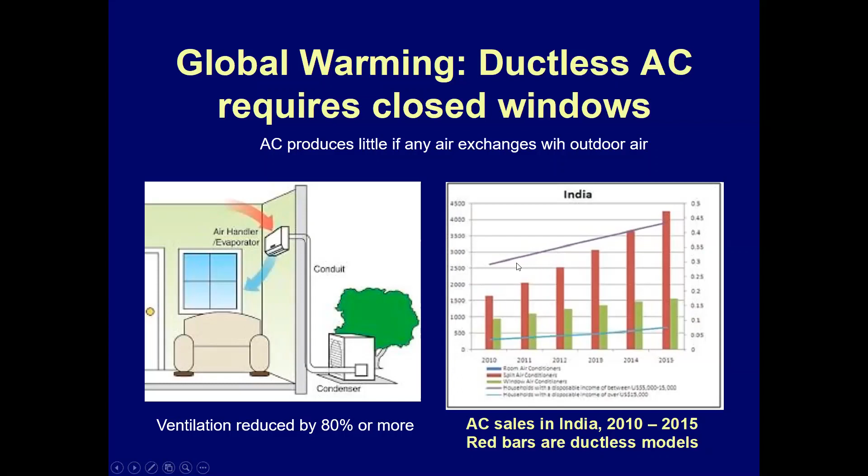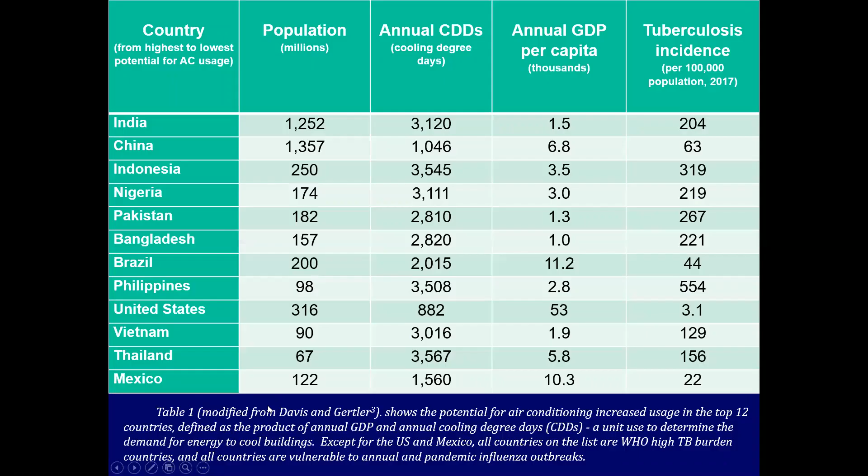And there were 5 people in the room. The window was open. Then we closed the window and allowed CO2 to equilibrate, and then closed the window and turned the air conditioning on.

What does that mean? It means when the CO2 level doubles and the ventilation level is halved, the risk of airborne infection is 2 times higher. Double it again, it goes up another 2 times. So basically we're rebreathing the same air, and the risk, if there's a person with tuberculosis in the room, is quite high as you close the windows.

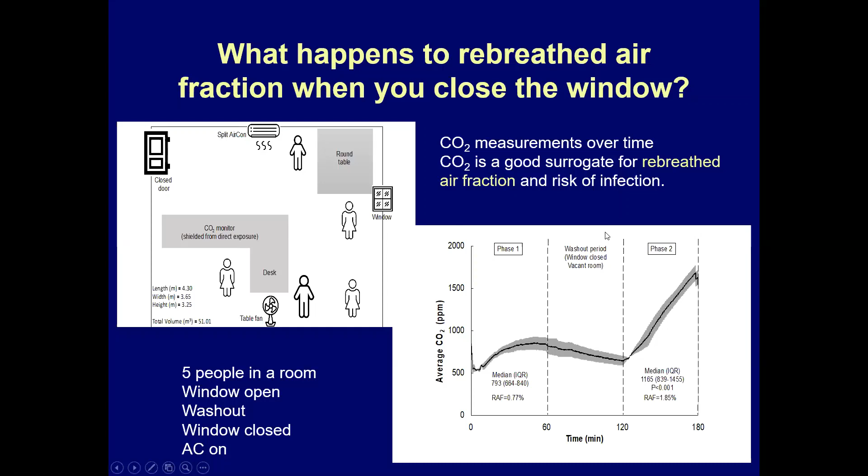You may know that the highest rates of multi-drug resistant tuberculosis in the world are in Russia and former Soviet Union countries. There are many reasons for that, but among them are the ease of transmission in indoor congregate settings, and perhaps also in homes where windows are closed tight because of the cold. Now in warm places the same thing is happening.

I've written this up, that little demonstration, into an article called 'Cool But Dangerous: How Climate Change is Increasing the Risk of Airborne Infections,' and this will be published in the journal Indoor Air in March, and you'll see this in print.

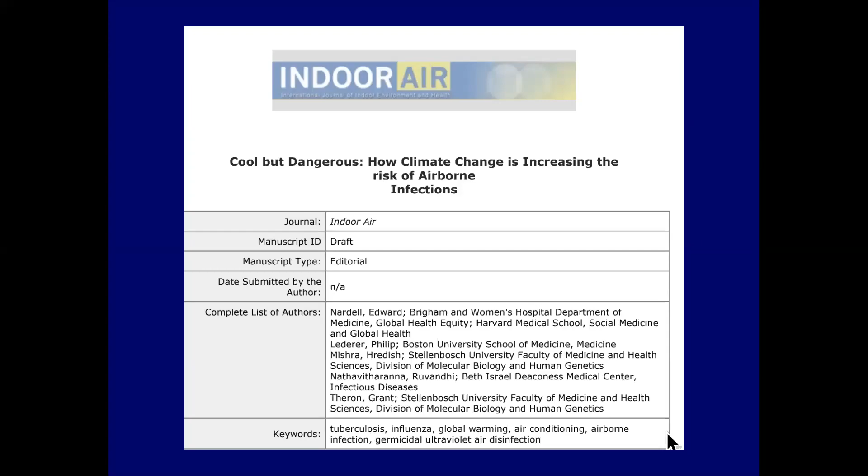Again, the journal is Indoor Air, and it's a commentary with that experiment I just showed you. We didn't need to do that experiment—any engineer could tell you that as you reduce the ventilation by half, the risk will go up by twice. If you reduce the ventilation by half again, which is at least what happens when you close the windows, you increase the risk again by 2 times. So you can go to 4 or 5 times the risk without any difficulty.

What happens when you can't air condition, when you can't open the windows? You need to disinfect that air some other way. That's where there's increasing urgency to implement germicidal UV in places where natural ventilation cannot be used.

That may be in Eastern Europe because of the cold outside, and it may be increasingly in warm climates because of the use of ductless or even ducted air conditioning. So natural ventilation is essential, but it has its limits. It's perfect for outdoor waiting areas where that's possible, but in cold climates and very hot climates, in air-conditioned environments or rooms heated by air conditioning, you really need an alternative method.

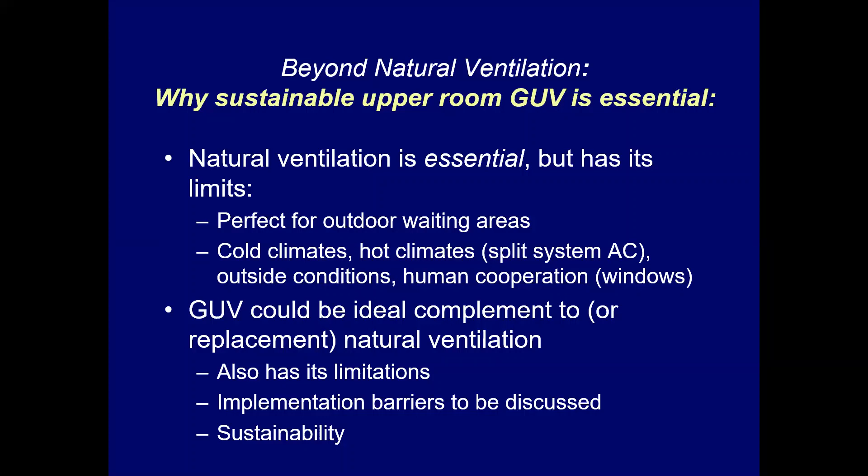There are really only two alternatives to natural ventilation: one is germicidal ultraviolet, which I'll talk about in detail, and the other is room air cleaners. I think germicidal ultraviolet could be the ideal complement to natural ventilation, or replacement when we can't have it. But it has its limitations, and there have been barriers to its implementation, and issues around sustainability, which we'll discuss. Here are the alternatives.

A lot of manufacturers will tell you that these machines work, and they do, to the extent that if you put contaminated air in, what comes out is germ-free. What they don't tell you is how much air goes through this device and what that means in terms of room air changes. Very often these devices are limited by flow, so the number of air changes they can produce is rather limited. I'll go into this in more detail in a moment.

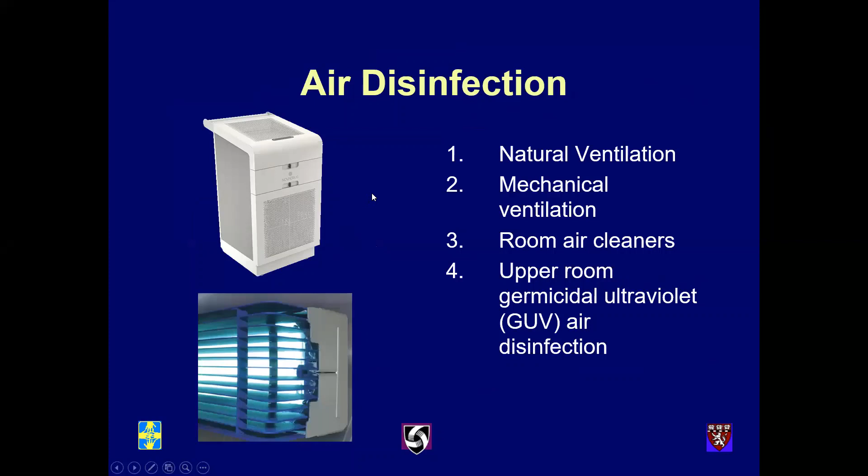And that assumes there's no short circuiting, because one problem with these devices is that some of the air that's just been filtered ends up coming back into the device again and gets refiltered, not adding to the cleaning of the air, but reducing the overall efficiency. So at best, this is producing 2 air changes.

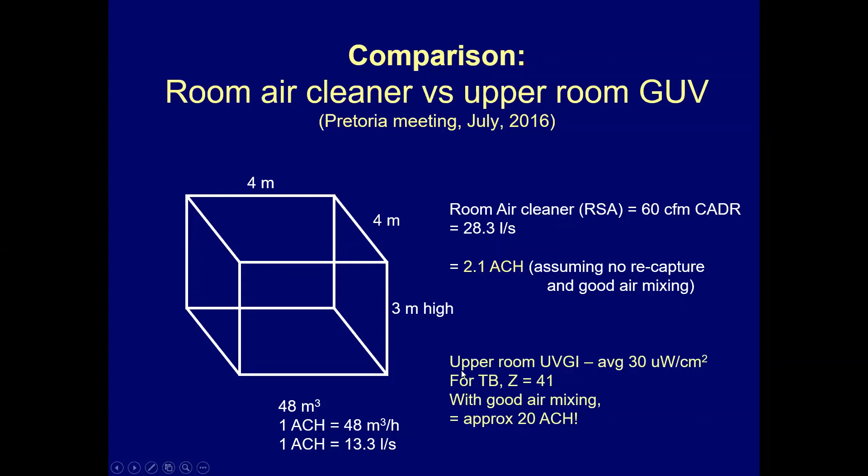I'll show you that in a similar room with 1 UV fixture and a paddle fan, we can produce the equivalent of 20 air changes per hour—about 10 times that—and we have done experiments to prove it. So the idea with upper room germicidal UV is to irradiate the entire upper room, a rather large area and volume.

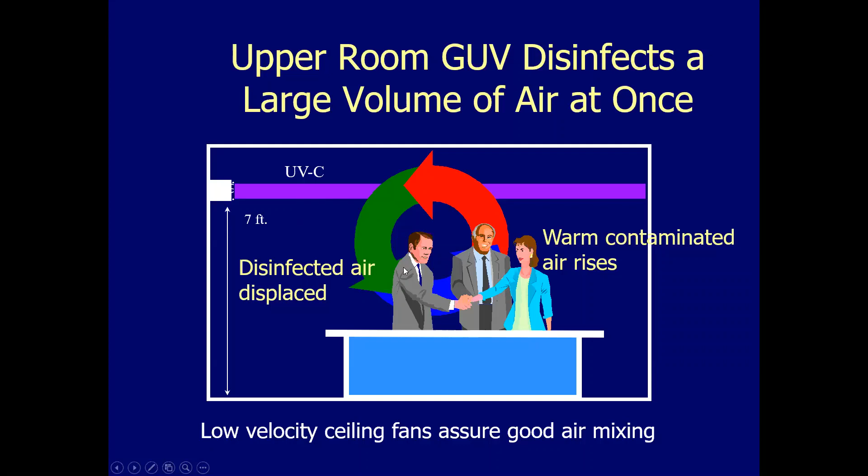All of the air that makes its way to the upper room from body heat, or ideally with a ceiling-mounted paddle fan—the kind used routinely all over the world—mixes through that upper room and gets disinfected over and over again. That produces very high rates of air disinfection and is quite safe for people in the lower room.

I'll show you a comparison done in Russia by Grigory Volchenkov, head doctor at the Oblast of Vladimir TB dispensary, and Paul Jensen from the CDC, known for his work in TB infection control. They set up an experimental room in a hospital in Vladimir, a cold climate, and compared mechanical ventilation, upper room germicidal UV, and 3 different air cleaners.

One of them was a device used in the Russian space satellite, the manned space satellite, to keep that air clean. So it was rather expensive.

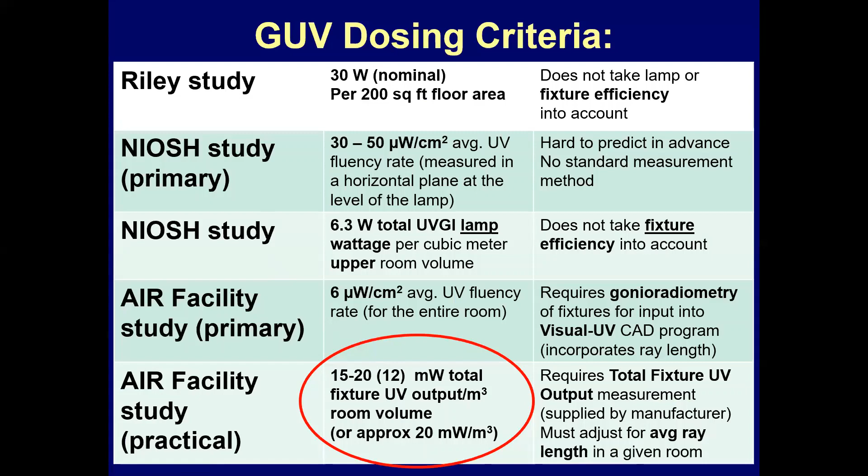Dosing criteria — there have been many dosing criteria over the years produced by NIOSH, and here we came up with a way of doing it based on the volume of the room. I'm going to tell you it's probably a little less than this. We were originally using 17 milliwatts per cubic meter of room volume. We think that 12 is adequate. We repeated the study we published and got even better results that suggested we needed less UV than we thought. So here's how it works.

If we put 17 milliwatts per cubic meter, we would need 2.5 watts. If we put 12, we would need less than that. We need to know how much UV is coming out of a fixture — one of our best fixtures puts out half a watt. So that would require 2.5 watts, requiring 5 fixtures, usually on the walls that allow for the longest ray length. Now, if we use 12 milliwatts per cubic meter, which is what we currently recommend, we'd only need 4 fixtures instead of 5. But that's how we decide how much to use.

They're put up on the wall above people's heads and maintained. Now, I mentioned that UV is quite safe. We try to keep it above the heads of people in the room, but some does bounce off the ceilings and off the walls.

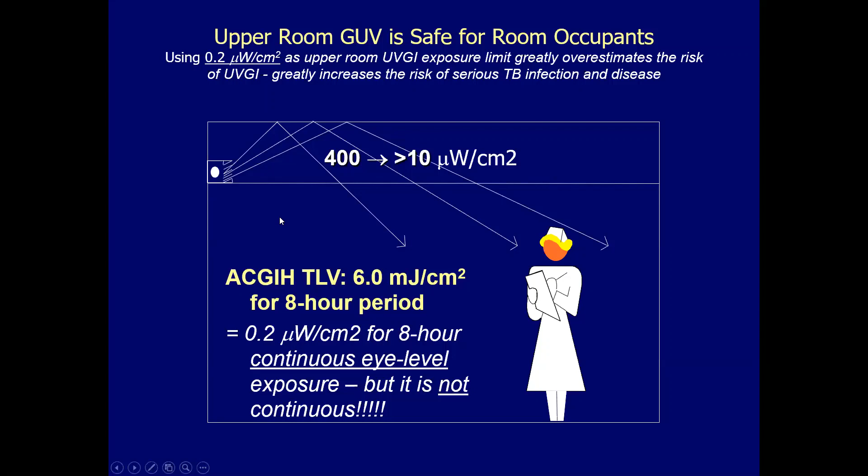It turns out that very few people receive anything near that, particularly their eyes, because they're walking around and not looking at the fixture if the fixtures are properly installed. The only time we get into problems with eye irritation is when the fixtures are installed upside down, or someone climbs up a ladder and looks directly into one of these fixtures and gets eye irritation. But otherwise, quite safe.

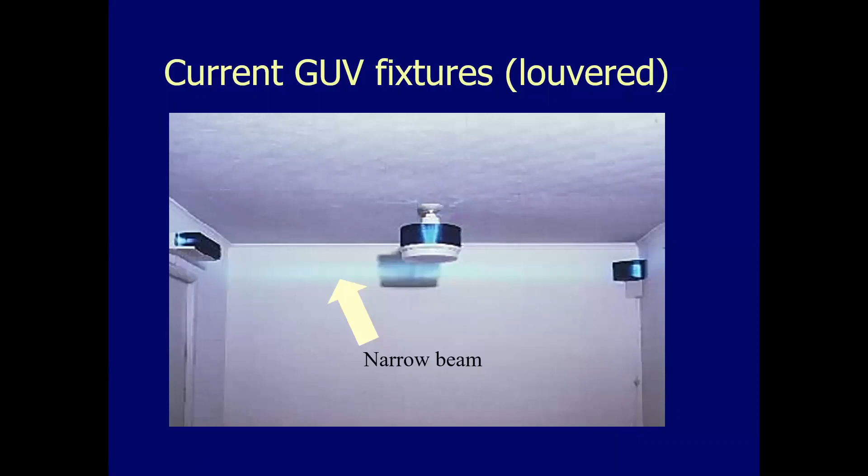So these are quite safe. Now, fixtures vary considerably in their construction, and for a long time we've recommended these louvered fixtures. Unfortunately, they're quite inefficient. They don't put out very much UV, but they work quite well. Some fixtures are more efficient than others. The ones pictured here produce very little UV, while these with a better design put out virtually 10 times more UV. So the important thing is to know how much UV comes out of the fixture.

If a salesperson tells you how much electricity goes into the fixture, that doesn't tell you how much UV comes out. So you don't want to know what the wattage of the lamp is. You want to know how many watts of UV come out of that fixture. And we're insisting that manufacturers tell you that.

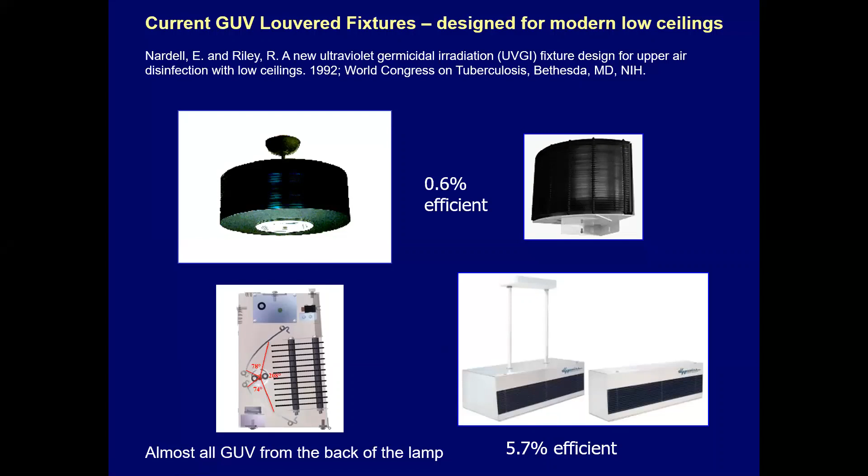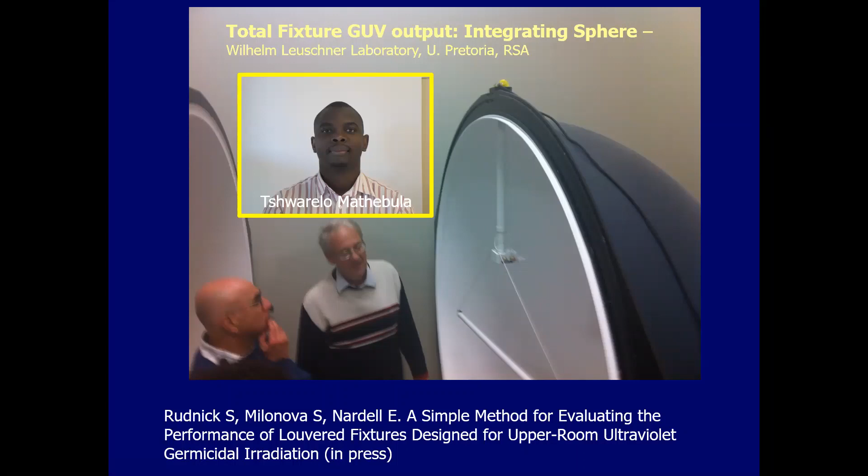Another way is to put the fixture on a large device that rotates around a meter, and the meter measures how much UV is coming out from every possible angle.

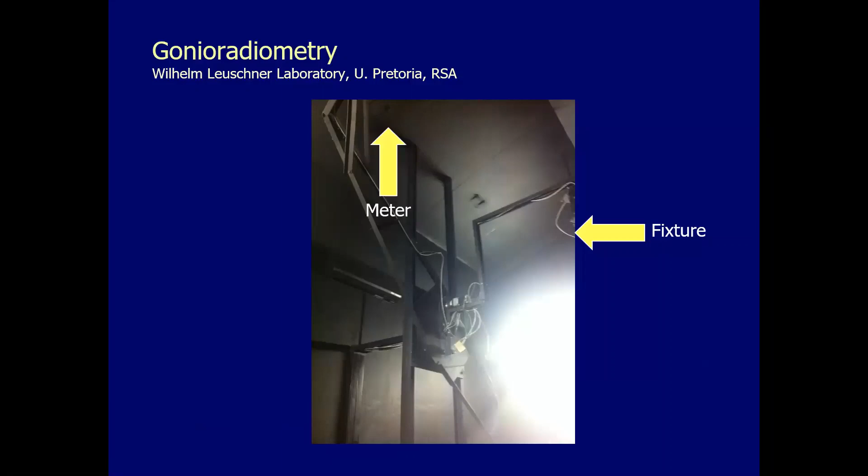Initially they're expensive to produce, but as the technology goes on, they get cheaper and cheaper. They last a long time. They draw very little electricity. They use direct current and therefore can run off a battery or off of solar power.

So we've had a couple of prototype UV fixtures made with LED UV devices, which are being produced by a number of different companies. Right now, they're still very expensive, and the power is increasing every year. They're being used for a variety of applications, really not practically yet for upper room germicidal, but they're being used for water disinfection and for inside of devices that require ultraviolet.

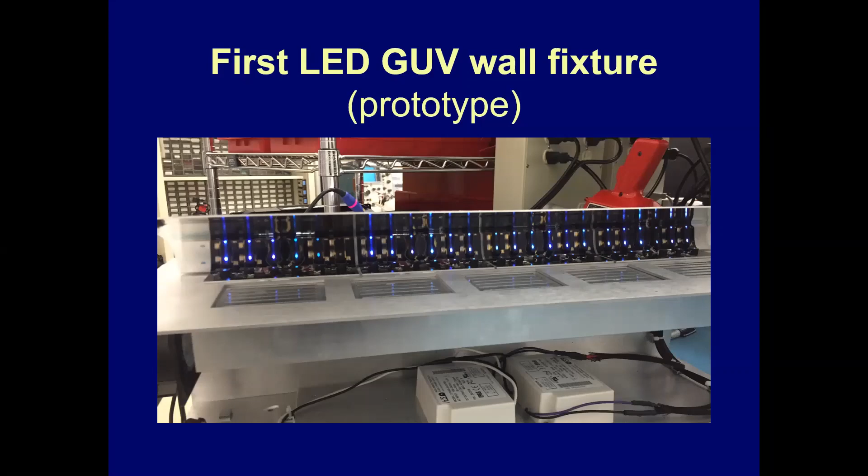They would buy the fixtures from a manufacturer, or you would buy them from the manufacturer, and they would put them in and maintain them. So you wouldn't expect your hospital to have that expertise. Service Master, which is in a lot of hospitals in different parts of the world, including India, would come in periodically to dust the fixtures and make sure the lamps are working.

If you don't do that, what happens is you come back a year later after you've installed these fixtures and you'll find that they're full of bugs, or that lamps have burned out, or they're terribly dusty, and they're no longer really doing what they're supposed to do.

Now, again, you can have your hospital maintenance do this, but the reality is you train somebody and then they move on to a different job, and the person who comes in doesn't know how to do it, and they're afraid, or somebody gets an eye burn. So this team that would come in and do it periodically for hopefully a reasonable fee would have the expertise to plan, install, and maintain upper room germicidal UV.

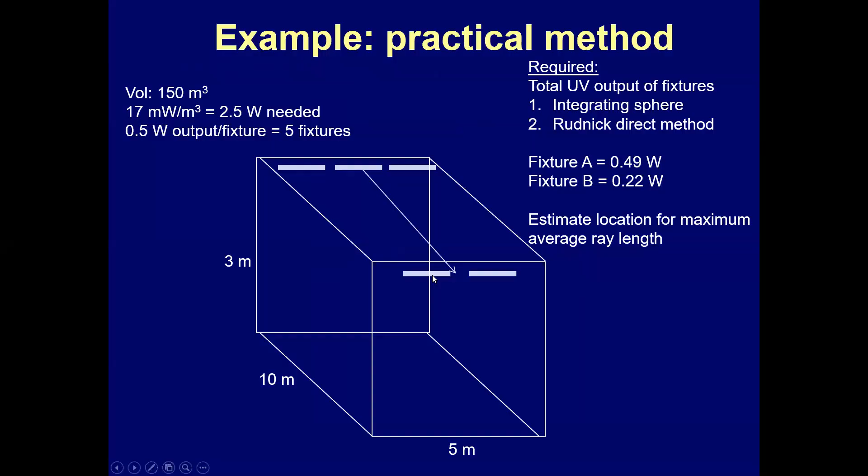So anyone in the audience or in the office at URC have any questions that we can talk about further?

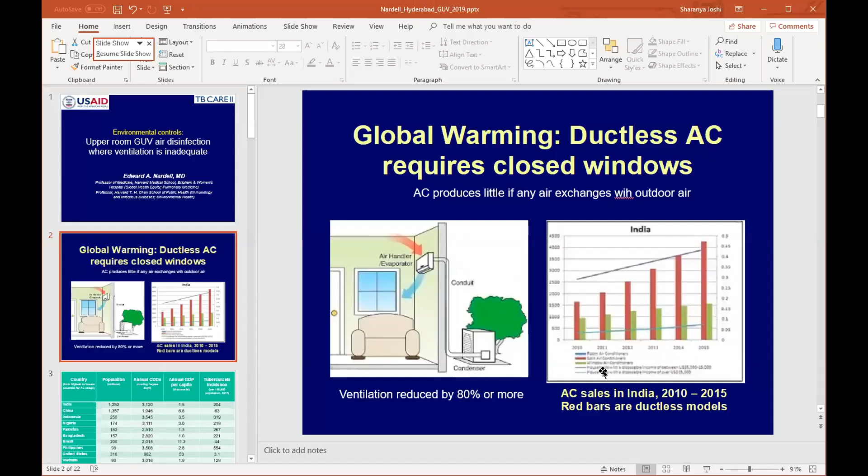Yes, I think it's very timely. I think our biggest challenge has been in getting the UVGI program implemented. I think there are still a lot of barriers and all that. But I'm going to talk about more current things. Yesterday I was watching news about measles. I'm not sure if you watched it, but a couple of people passed through LAX, and then they went to Denver. So they were all looking for people. And again, measles is spread via airborne transmission. So the question is, I suddenly saw there's such a sense of urgency, worried about all those people who may have come in contact with these three individuals. But with TB, at least in developing countries—maybe not so much in the US, but in developing countries where there is a lot of TB in the community—I don't see that sense of urgency. So the question I had for you: what do we do to create that sense of urgency? I know you've been pushing this concept for a long time, so what do you think we're not doing to create that sense of urgency?

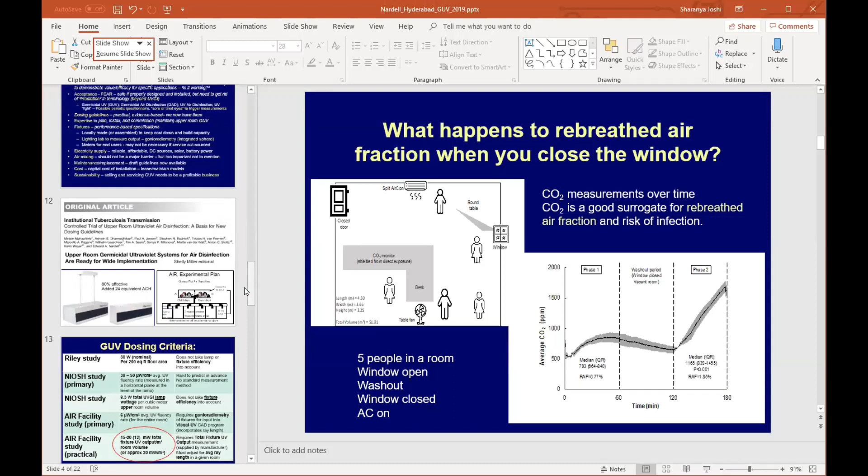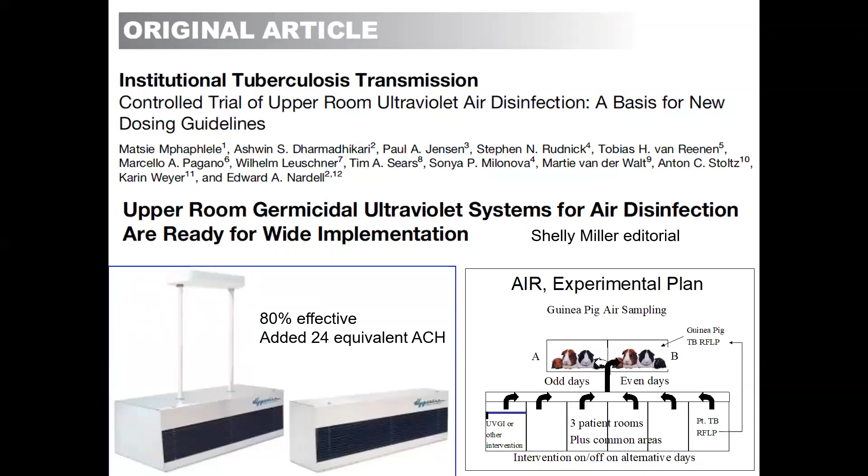Well, thanks, Niraj. I mean, it is frustrating because we've been sitting on a technology that we know works for more than 70 years. And we could go back to this list of barriers, and I pretty much have them listed. Yeah, you just went through that. Yes, there it is.

So right now, actually, we have a bit of a plan, and it may take off. My thinking was that if we were to get the attention of the Mitsubishis and the Fujitsus of the world, the Carrier—the big companies that make air conditioning—if they were to pay attention to this problem and say, well, yes, they're causing a problem, they're part of the problem, but they can also make money selling the solution. If Mitsubishi and Fujitsu started marketing upper room germicidal UV along with their air conditioning for parts of the world where this is an issue, I think it would be a game changer entirely. We would have major companies involved, their marketing ability, etc. It would be, once it became routinely applied, the maintenance would follow, and so on.

I think we suffer from this being manufactured right now by very small companies, mostly in the US, where there's not a huge need for it, and less so in developing countries. Engineers don't learn about this technology in engineering school, and as a result it has just been in limbo. But if we can get a big company on board—we've been working on LED UV with a company called Excelitas, which designs fixtures, and because of the measles and influenza potential they've taken an interest, and they have direct connections with Mitsubishi and other big companies I've been unable to approach. We're hoping if we can get to their marketing and development people, and if one of them gets on board, all of them will want to, and we may see a complete change in the landscape.